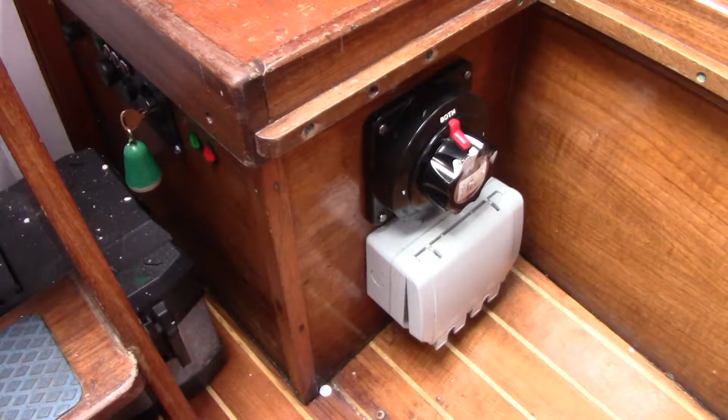Okay, so let's take a look. Turn the engine on - we just put the ignition key on here, silent button there, and start.

What you're going to be looking for is obviously water coming out the back. Now as you can see, there's not a lot coming out the back of this engine. This is indicative of the fact that the inside of the engine ain't too good. And before you say it's the impeller - it isn't, because I've changed it. Let's take a look at what happens when we speed the engine up a bit.

Okay, so we've warmed the engine up now for a good few minutes, turned it off because of the din. The next thing we're going to want to do is clear access to the engine, so I've already taken the stairs away. We're just going to open the front panel here.

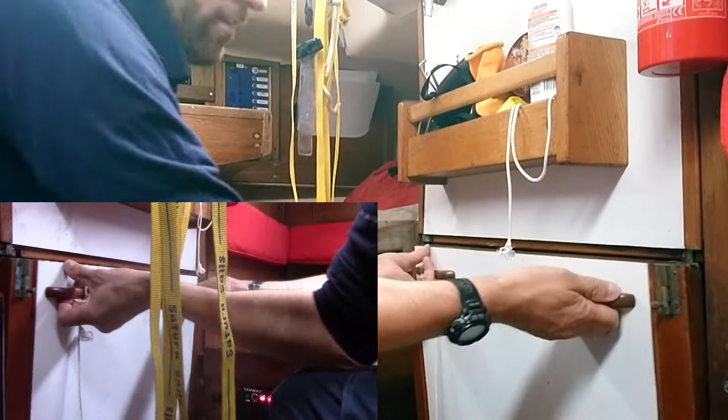Now, move that back there, out of the way.

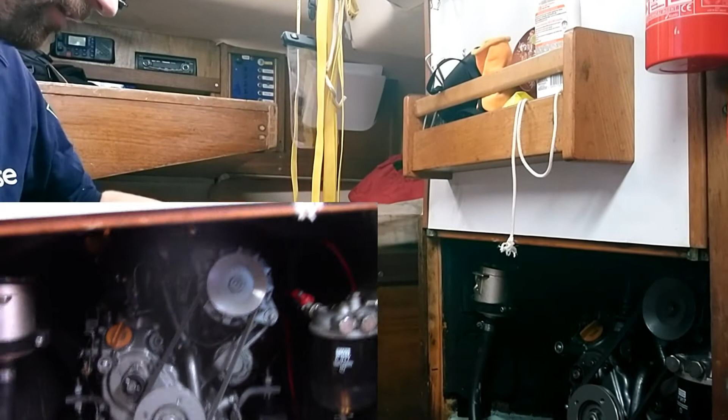Now, because I'm an engineer, you're about to see something which I think you're going to like. So if we look here at the engine, we're obviously seeing a pretty standard engine - very dark, can't really see anything, very difficult to get any idea of what's going on here.

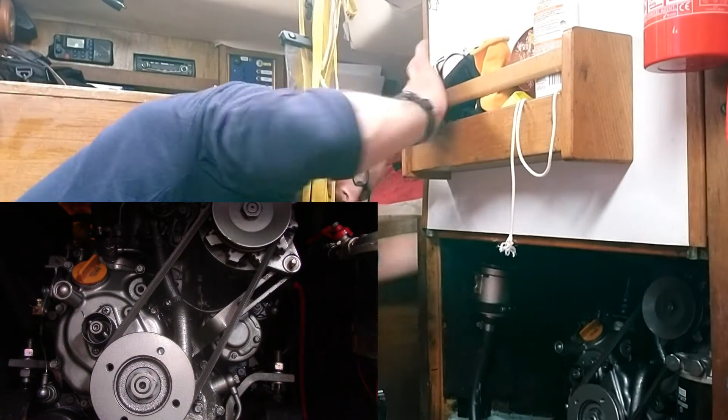It doesn't get much better if I open the side panel. So it doesn't get a lot better if I open the side panel, but let's do that anyway. As I said, it doesn't give much better view, but it does give us access.

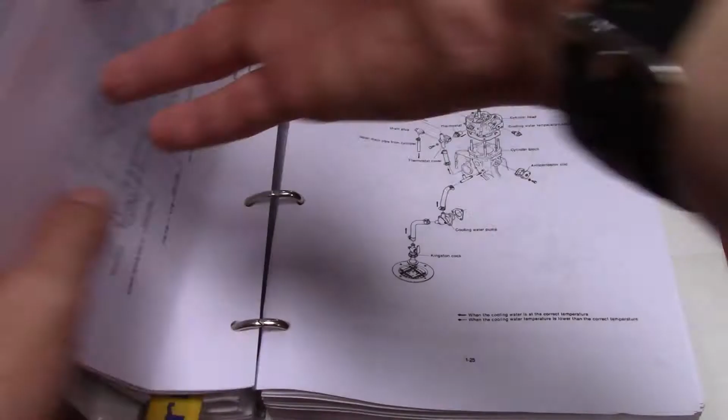Okay, so the first thing we're going to do here, obviously, is look at our old friend, the manual. Now, as you know, I am an engineer by profession, and it's long been a thing of mine that I quite like Japanese equipment.

What we've got here is a Yanmar 1GM10 engine. I don't know what engines are common where you live, but where I live in Scotland, this is a very, very common engine on a range of small boats. It's not very powerful, about 10 horsepower, single cylinder, indirect injection diesel engine.

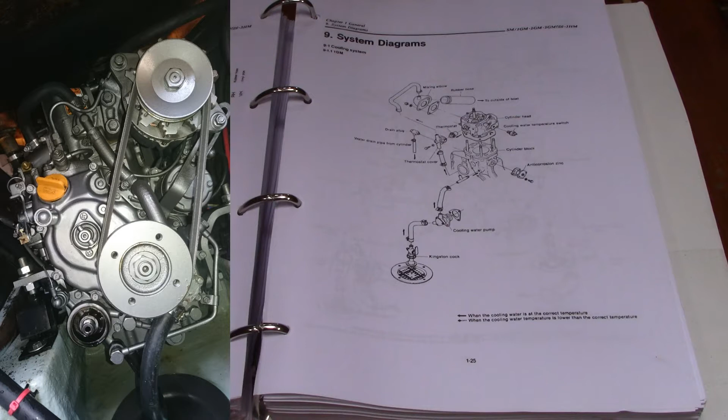You can see the main components of it here. Now, this engine I think is pretty new - I think it was installed just before I bought the boat about 4 or 5 years ago. So it hasn't done that much in the hours, and I've generally looked after it.

If you look, I have both manuals here - the 1GM10 manual and also the older manual for the 1GM series. There's very little difference between the two engines. I think Yanmar have been making basically the same thing since 1980.

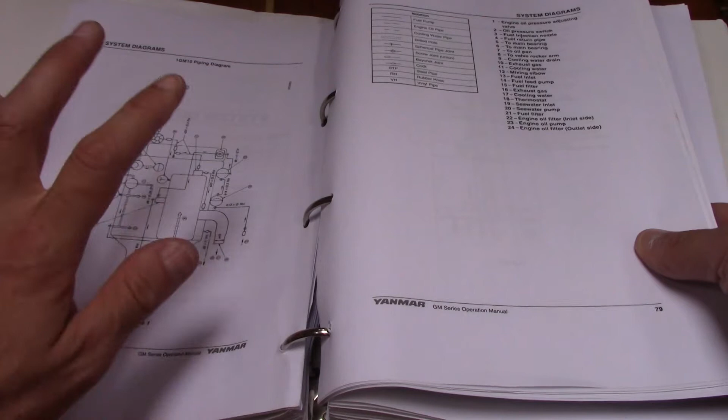The reason I'm using the older 1GM manual instead of the newer manual is because this is the diagram you get in the newer manual, which is really just a schematic and doesn't give you a great deal of information about what's happening. What I need to do is be able to identify the components easily, and that's why I have the 1GM manual.

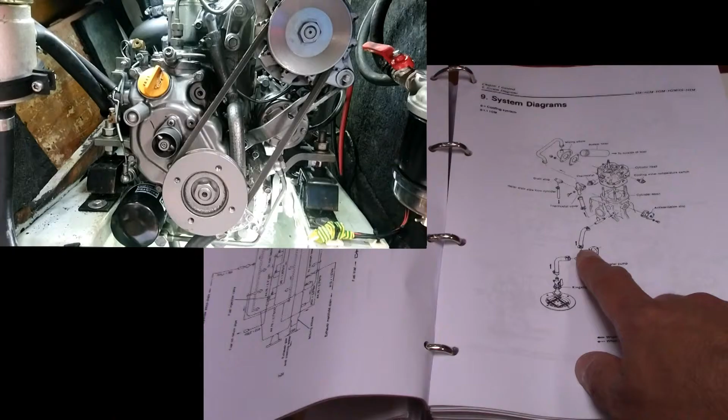What you've got here is the seawater comes in from the seawater strainer, which is here, and then it goes around this inlet hose here, around the back of the engine and into the water pump, which is here just behind - not the flywheel but the alternator pulley.

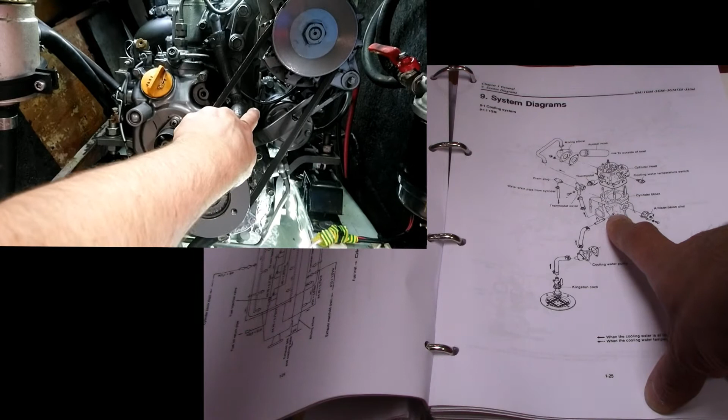That pump is gear driven off the engine. From the outlet of that pump there's a silver rubber hose connected to a T-section, one bit of which goes into the engine block, and the other bit goes up through this small rubber hose into this unit, which is the thermostat unit.

Now that thermostat's job is to bypass the water when the engine's cold. So basically if the engine's cold and you've just started it, the thermostat closes.

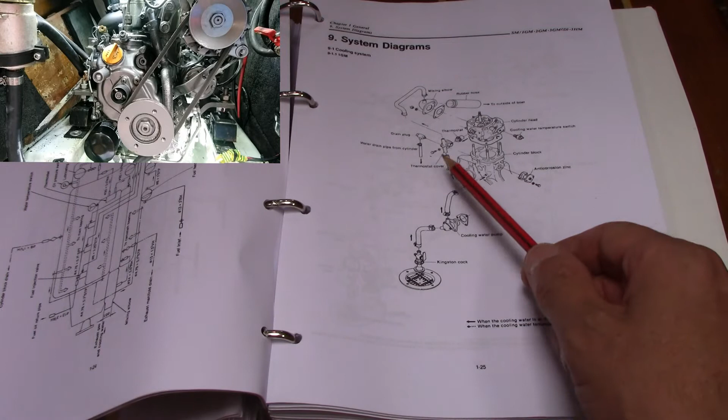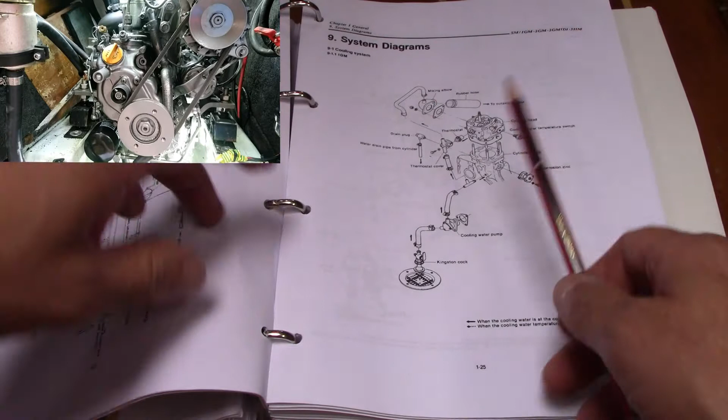That means water can't get through the engine block and out through the head, and instead it diverts straight through the thermostat. Then from the thermostat, whether it's cold or hot, whether it's been through the engine or not, it comes out of there and straight into the mixing elbow.

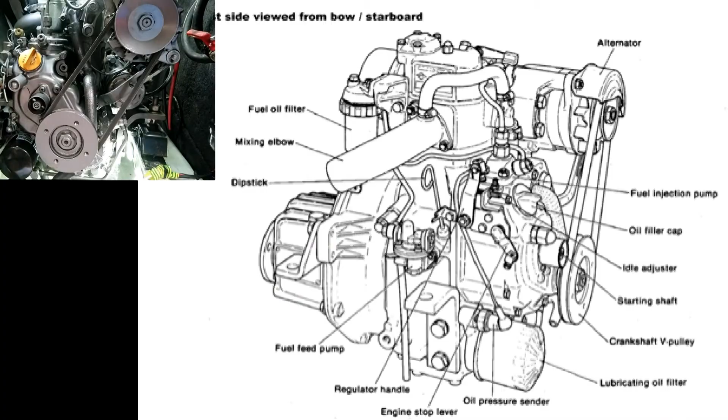Now the mixing elbow is quite important because the exhaust from the engine is quite hot and it goes down through a rubber hose. So one of the reasons the raw water is dumped into the mixing elbow is to basically cool it down on the outlet, on the rubber hose outlet there.

Otherwise you might run the risk of melting your rubber hose. You'll get away with it for a few minutes, but not as long as I'd like.

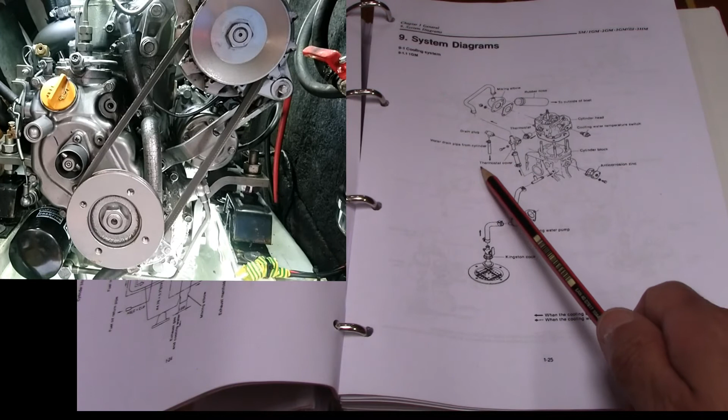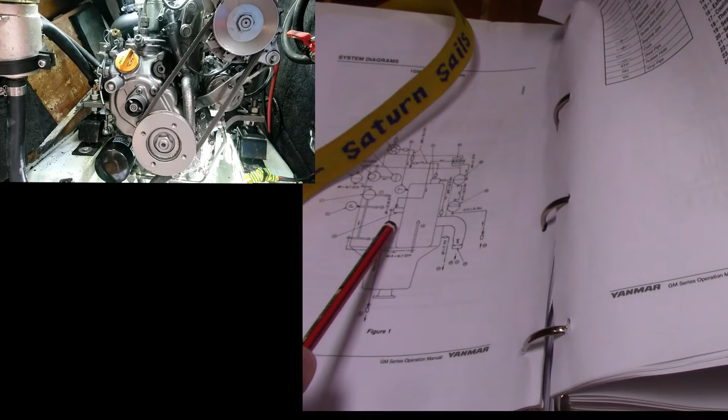Now on this 1GM manual, it says there's also a drain plug and a little hose on the thermostat. That doesn't appear to be the case on the 1GM10, and it's not shown on the 1GM10 schematic. So there's probably a couple of minor differences like that between the two engines.

Just so you know, internal combustion engines are very low efficiency engines, so even diesels, which are amongst the best, you're probably only looking at about 40% efficiency.

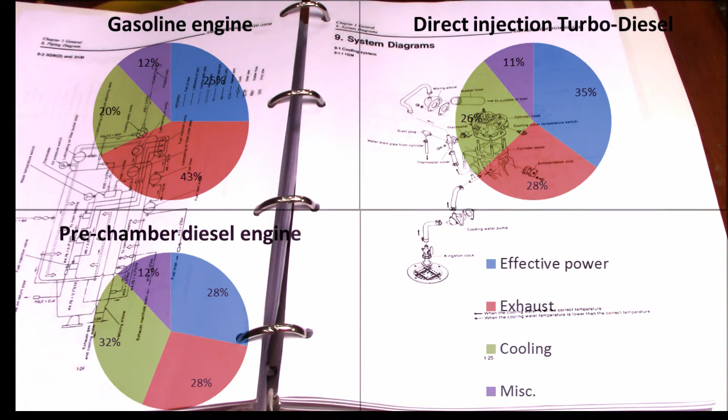Much higher if you've got a big diesel engine that you can control very well, but these small diesel engines are probably even lower than 30%, to be honest.

30% of the heat probably disappears down the exhaust pipe, hence why that needs to be cooled, and then 30% of the heat roughly goes into the radiator cooling system on a land vehicle.

Now because on this vehicle there is no radiator, the radiator is also the exhaust pipe, so you can be sure that about 60% of the total energy in the fuel coming into the engine is actually disappearing through the exhaust pipe in hot gas and hot water.

At best sort of 30% maybe is going through the propeller shaft, and maybe another 10% is just miscellaneous heat radiating through the side into the engine compartment, or noise, or all the rest of it.

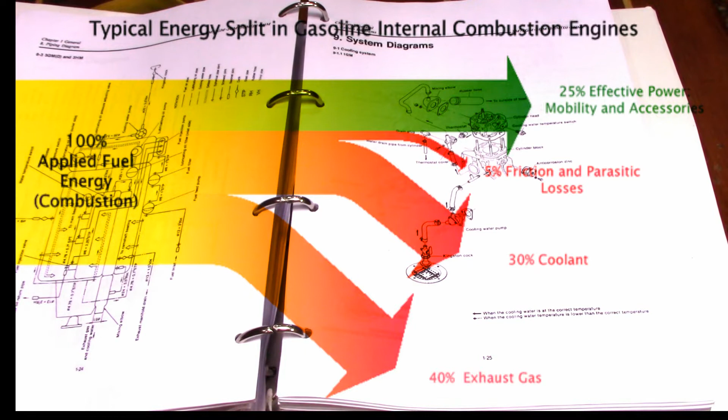And that is why we need a cooling system, because if you've got 10 horsepower of propulsive power, then you need sort of 30 odd horsepower of cooling.

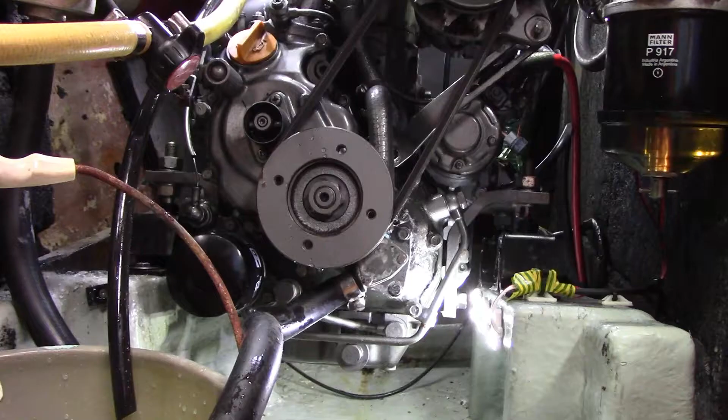Okay, let's see what we're going to do next. So I've done a little bit of plumbing, and what we've got here is basically a bucket. I've taken the suction hose from the water pump here and put that in the bucket with a strainer on it that I've made out of an old glove.

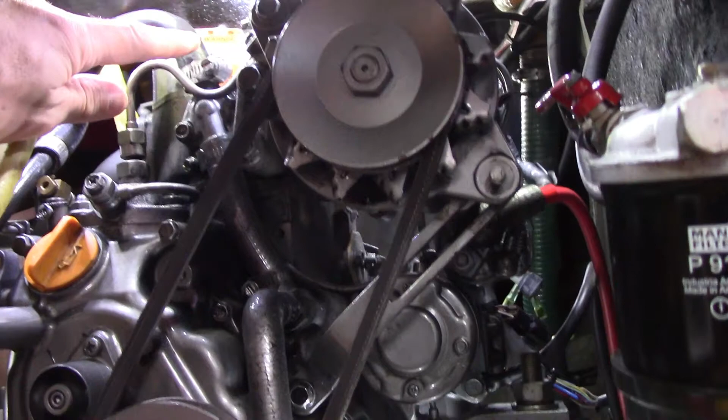I've then taken the thermostat cover discharge hose here and run that down back into the bucket. So effectively what we've got now is a closed loop system, so it's going to suck water from here, run it through the engine, and then blow it back in here.

Now obviously over time this bucket is going to get hotter and hotter, so we're going to get warm water. Then most importantly, I've connected this hose here to the discharge elbow, so I'm going to basically supplement the water that would be coming out of the engine with fresh water going down the discharge hose.

Now that's all very well, Ollie, I hear you say, but what about cleaning? Why am I doing this in the first place?

Well, I've got calcium carbonate building up in the back end of the engine here. I've recently done a service, replaced the anodes, etc., but I suspect a lot of the hoses and areas like that are covered, so I am going to be cleaning the engine with a well-known household product.

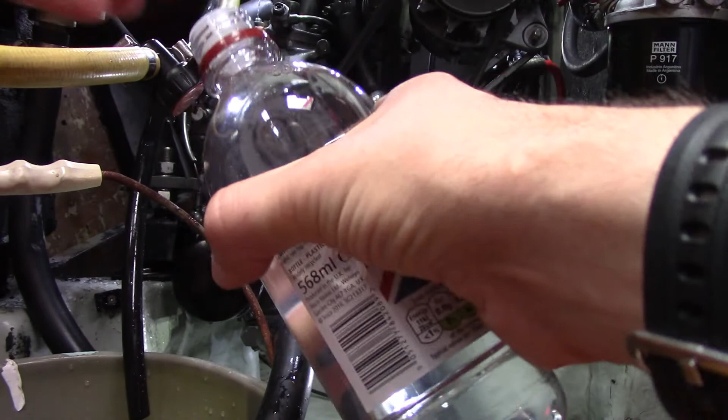This is distilled vinegar. Now we're going to chuck that in there. Oh good, it's got one of those little discharge things in it. But we're going to obviously cut to commercial first.

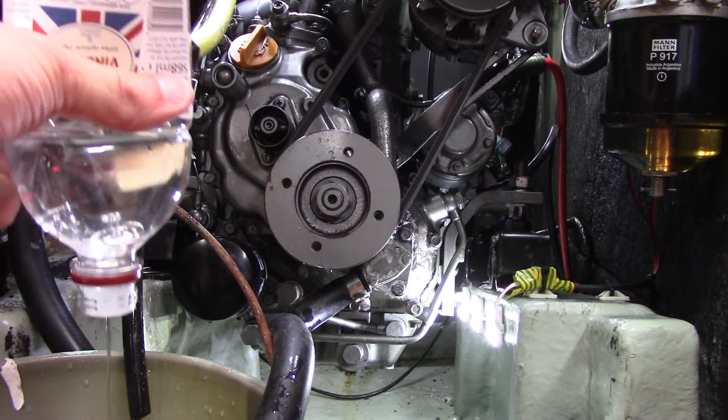Now while I'm doing this, I can tell you that the vinegar's at a pH of about 2.9, versus about 5.5 for water, so that should, along with a little bit of heat, hasten the chemical breakdown of the mainly calcium carbonate deposits in there.

So we've got quite a lot of this stuff. I'm not sure how much, or what dilute fraction we should go in for in the first place, but we're going to try it, and in theory, if we get little chunks of crap coming out of the end of the tube, then we're onto a good one.

And if not, then it could mean two things. It could mean there isn't a lot of mess in there, or it could mean that it's not breaking it down.

Before I begin, I really cannot emphasize this enough: the sort of thing I'm about to do, if you get it wrong, could kill yourself. There's two main reasons I've got this pipe here going up to the exhaust elbow. One is to protect the engine because it's expensive, but the second is to protect my life. If you don't have that, you'll get exhaust blowback into this compartment. Carbon monoxide settles low on the ground, and if you were standing here, you could be knocked out very, very quickly—you wouldn't even have time to realise it. So safety first, don't do it.

Okay, let's try this out.

Now we can see here, this is just fresh water coming out from the hose that I've connected to the engine. So it's always good to check that.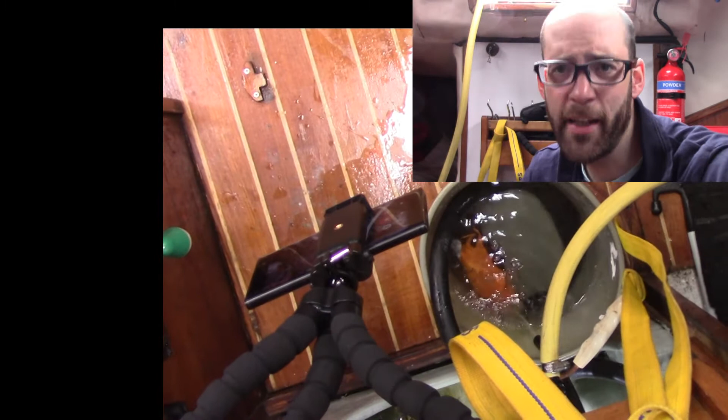Okay, so everything looks like it's going quite well. I don't know if you can hear me over the noise, but we've got a good circulation of cooling water. Stick my hand in the bucket, it's starting to get to about 30 odd degrees centigrade now. There really hasn't been much coming out of it, although the contents of the bucket do look slightly darker.

What we'll need to do, once we've got it up to temperature nice and warm, is turn the engine off, leave it there for an hour or so, then come back to it. Do it again, leave it another hour, come back to it. Do that a couple of times and we should be good to go.

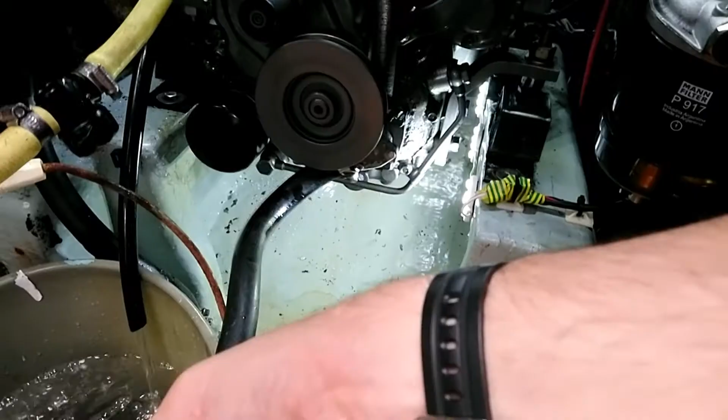Okay, I've been running it through for about 15, 16 minutes. We're starting to get quite a lot of crap come out of the discharge hose back into the bucket, which is the object of the exercise in the first place. So that's good. Starting to get some water vapour come off the bucket too, which again indicates temperature's come up. Should have brought a thermometer with me, afraid I didn't—sorry about that, my bad.

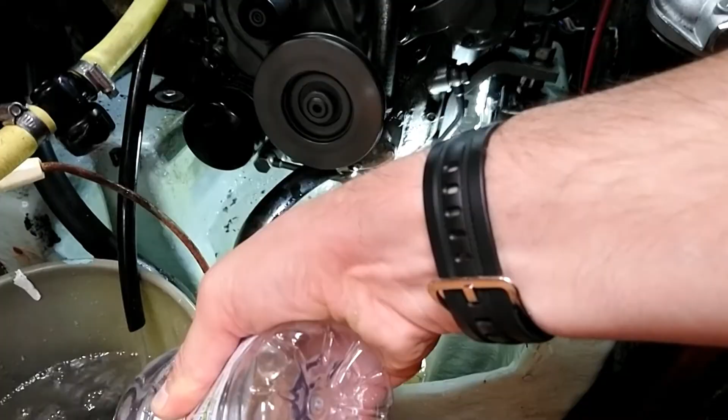What I've done is turned off the hose pipe cooling water to the exhaust port, turned off the engine, and I'm just going to leave it there hot to settle for, I don't know, 10-15 minutes or so. Go and get a cup of tea.

Okay, after half an hour we're back on board. The water's still steaming a little bit here, so now we're going to turn the engine on and see what happens.

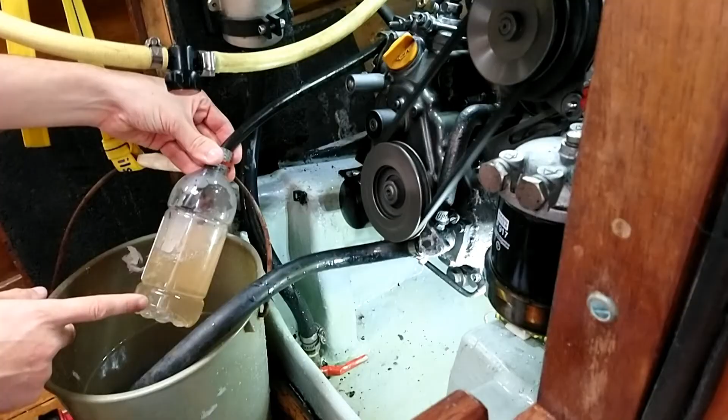What I have done is phoned up a chemist friend of mine who explained that yes, I was right using the acid to start with, but he also recommended that I then run a base solution through it afterwards. That's what I've done—I've run some bleach through it, and that should hopefully clear the whole situation up.

The argument is that acid has basically fewer electrons on it, so when it goes into metal it'll absorb a lot of electrons, which breaks down a lot of stuff. Now metal apparently—I'm no chemist, but this is what I'm relaying—will give up a lot of ions, so it's quite important after you've put acid through metal to neutralise it again or dilute it. I've obviously done both.

Interestingly, of these samples here, this is the sample I took from the engine after the acid or vinegar clean, and this is the sample I took after the alkali or base clean. Actually there's quite a significant darker tone in here, however there doesn't appear to be any suspended solids in it, whereas in here there's a lot of suspended solids.